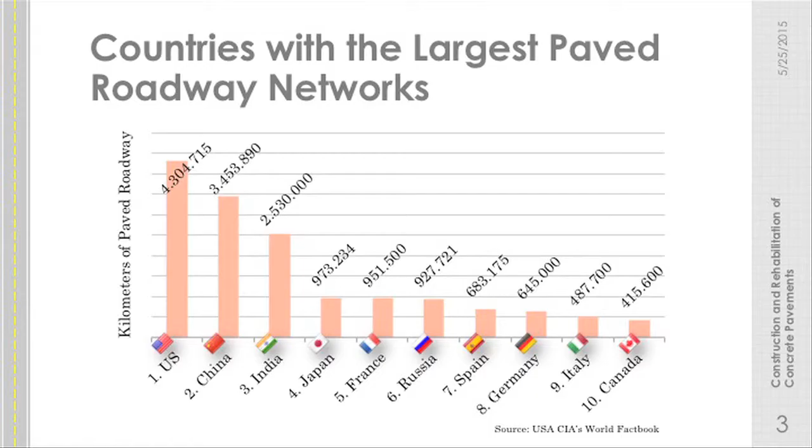My primary references for this presentation, I went directly to the source of the people that sell the equipment, because they take a lot of good pictures for publicity. So we have Wirtgen out of Germany, Gomaco out of Iowa in the United States, and Guntert & Zimmerman out of California in the United States. I've also pulled a fair amount from the internet, and I actually stole some photos from Astrid and other friends I've made along the way that I didn't reference like Mauricio did, so I feel bad for that. I'll point that one out, though, since she's in the crowd.

Again, we saw this photo earlier. In the US, we have a very large roadway network, and every year we pave on average about 50 million square meters of concrete pavement for roads. That's not everything—that's not industrial, airfields, and other spaces. That's roads. We're paving that much.

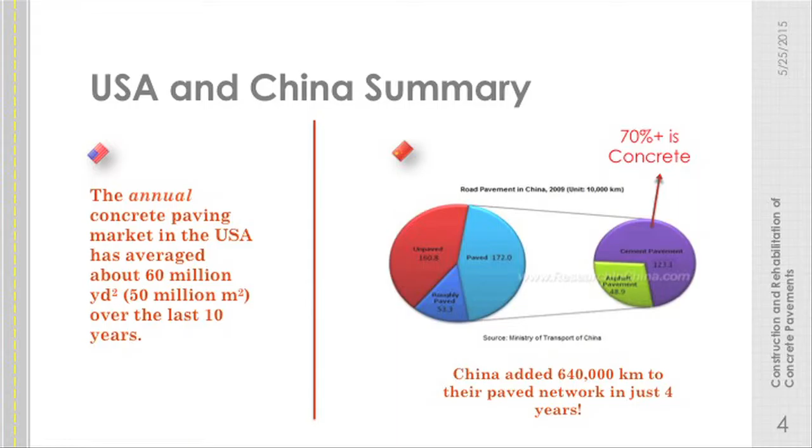Our biggest competitor, if you would call them that, with regards to roadway paving, is probably China. In the matter of 4 years, they added 640,000 lane kilometers of capacity to the roadways. And because they do so much manufacturing, they're moving a lot of raw material, building things, and then exporting the things they built to the US, Chile, and everyone else around the world. They have very high truck traffic loads.

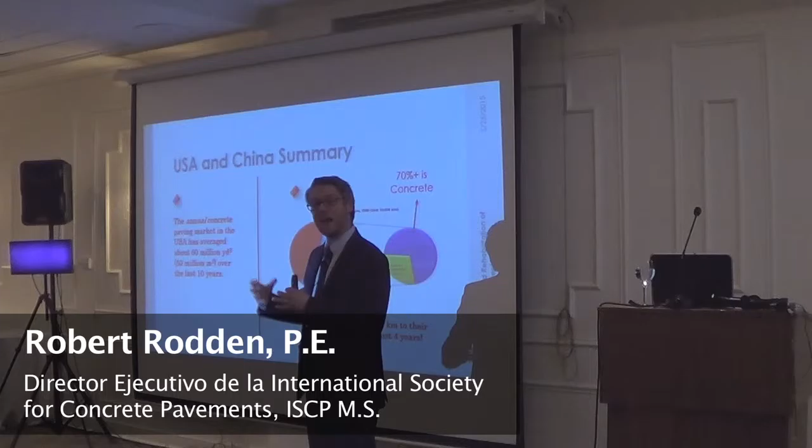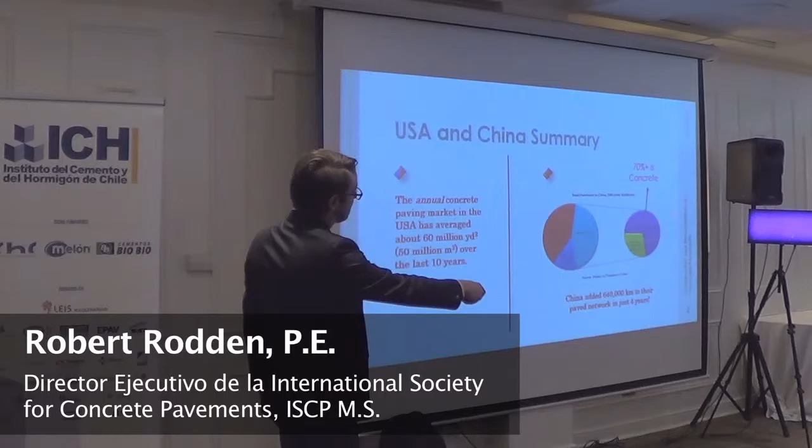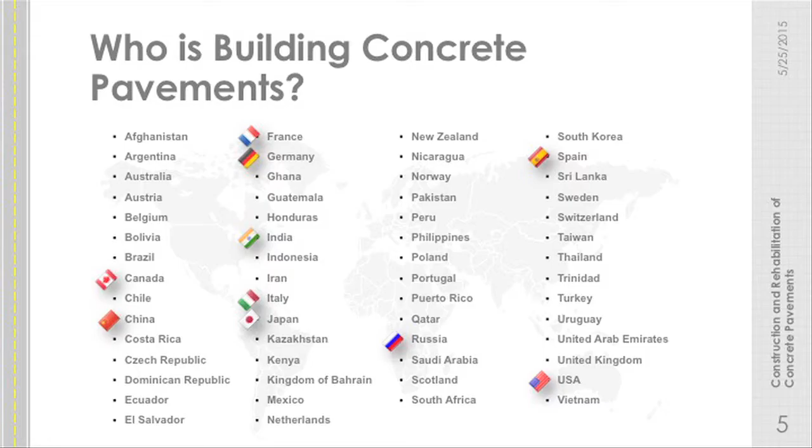In the US, our legal limit on trucks is relatively low compared to the rest of the world. In fact, most of our trucks, unless you're moving something very lightweight, drive around half empty. We say they scale out before they cube out—they run out of weight capacity before they fill their volume. In China, that's not the case. They fill the volume to move product, so they have very heavy traffic loads. Because of that, about 70% of their paved roadways are concrete, to fight against that and make serviceable pavements.

So who's building concrete pavements around the world? This is the list of countries that I've worked with or am aware of that build concrete pavements in my decade within the industry. All of those top 10 that we saw are on this list. If you know of any countries that are building or have built that aren't on this list, let me know—I'd like to get them added. But all around the world, people are building concrete pavements.

Some facts: the first concrete pavement in the world was built in Scotland in 1865. That section failed very quickly, within a couple of years. But some of the sections they built in 1872, about 140 years ago, are still in service—they're still there today.

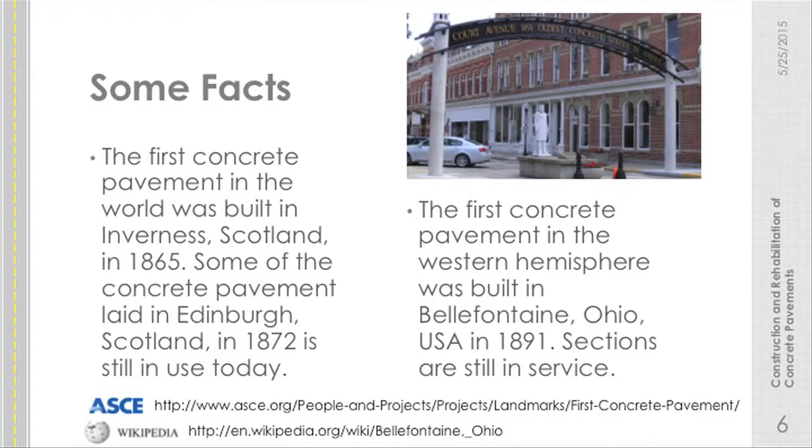The first section of concrete pavement built in the Western Hemisphere was built in Ohio. It's right here, still in service today. Built in 1891, it doesn't look great—it's had better days, but Ohio's a very high freeze-thaw state, and they use a lot of salt on the roadways. There was no structural design in those days; even into the 70s, we were still kind of guessing about things. So in 1891, what they did was say, we have lumber that is this tall, we will make a square out of that. The square's dimensions, the size of the slabs, was based just on mixer capacity—how much concrete can we make at once? Let's make it that big. That's it. No dowel bars, no tie bars, no logic about anything, just building concrete squares.

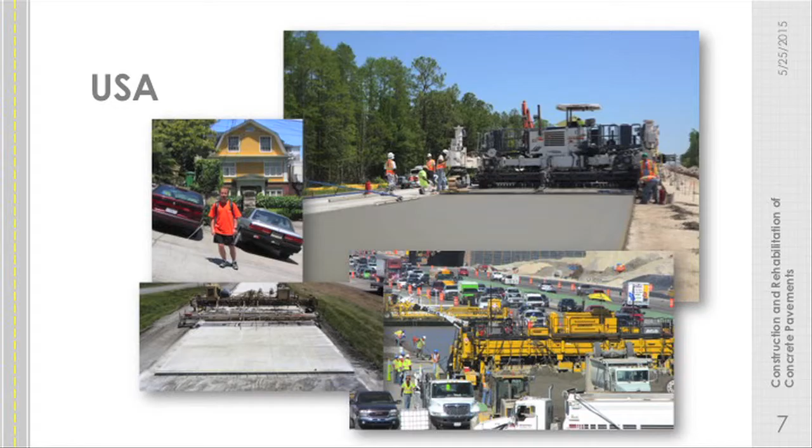The gentleman in that photo, the statue of him, George Bartholomew, had to put a 5-year warranty on that pavement. It's still in service over 100 years later. Is there a product in the world that's been warrantied for 5 years and lasted that long? Can't imagine any other product.

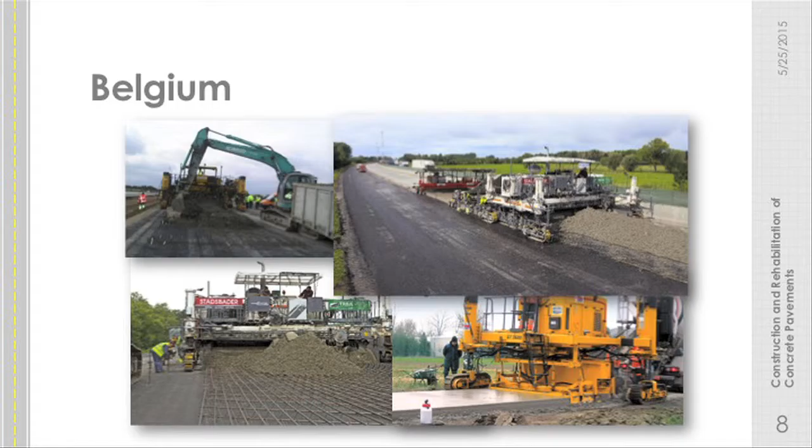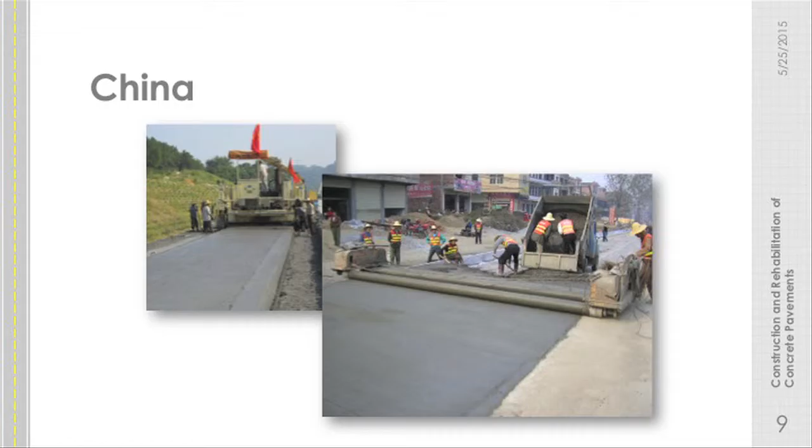So now we'll see photos from other countries. Just to try to be brief, I won't dwell too much on them, other than to point out differences. Like here, they're using a loader to move the concrete in front of the paver—we would never see that in the US. I'm not sure what limitation has them doing that, but they're doing that. They have dowel bars, as we use in the US. They also use continuously reinforced concrete pavements.

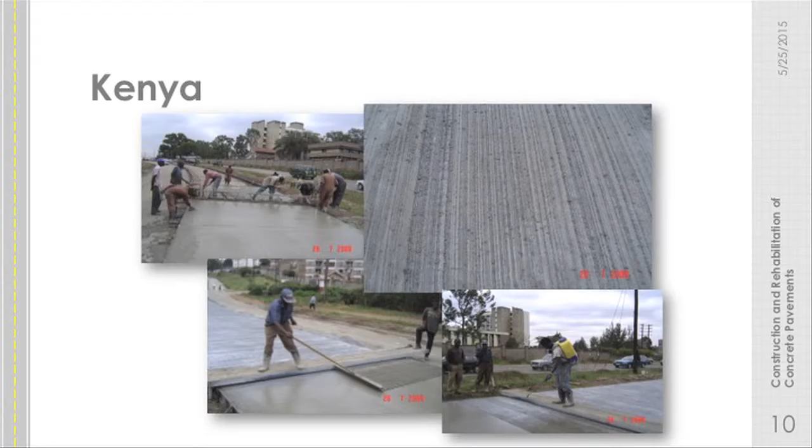In China, they're doing some fixed form paving without dowel bars. It's a double or triple tube screed. They're dumping right out of the back of trucks, right in front of the equipment, moving it around and leveling it off.

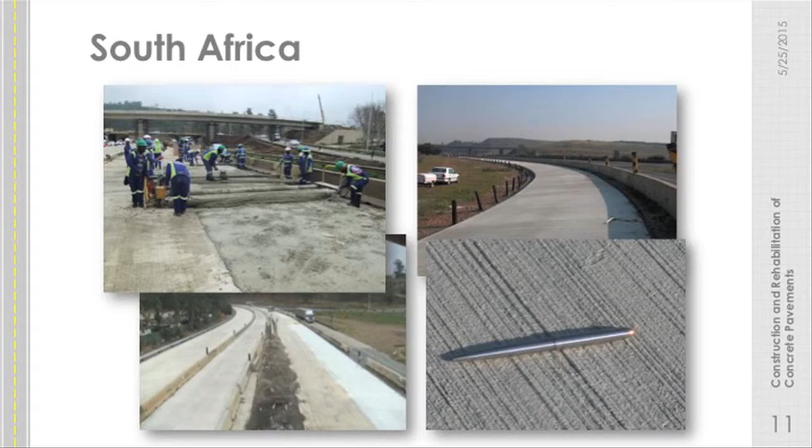Photo from Kenya. They have dowel baskets out there in front of this fixed form paving. They're using a truss screed, broom texture on the surface. You see that all around the world, and they're hand spraying on the curing compound. They don't have a white pigmented curing compound, but they're still using one.

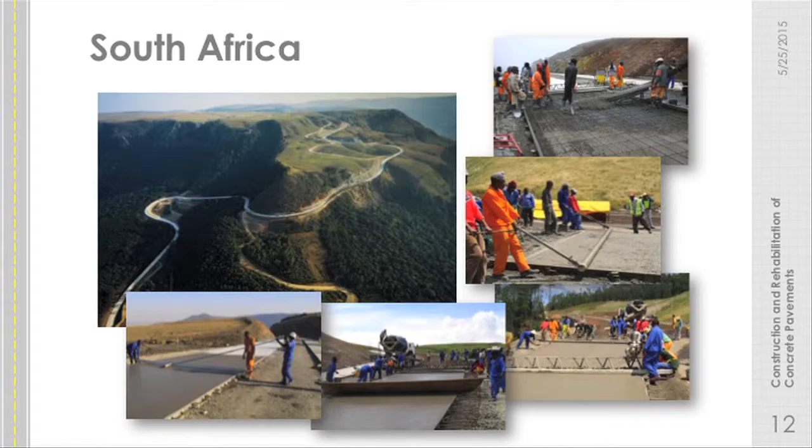South Africa. This is looking a little sloppy for what I'd like to see, but same idea. They're using almost the same piece of equipment that they had in China, and they're building very long stretches of concrete pavements in South Africa. Looks like they're also using a broom texture.

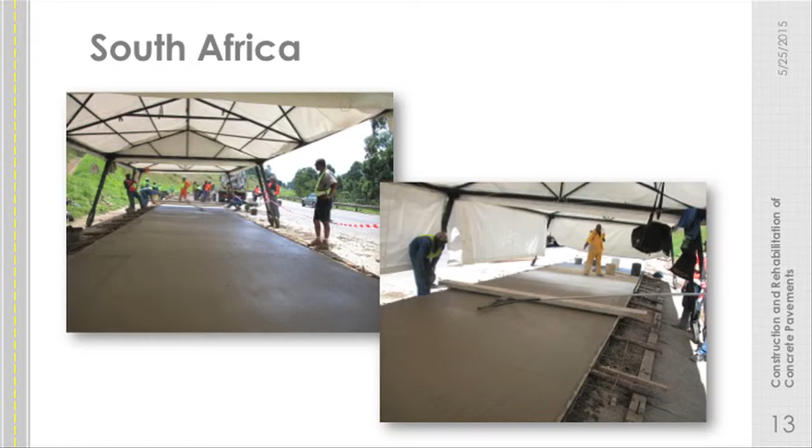Here's one project that I was told was in an eco-sensitive area. The supports for these bridges had to be constructed completely from above, with all equipment and material brought in by helicopter. Very expensive. So the roadway wasn't that much of a lift for them to build in concrete, even if the prices would have been more than asphalt. This is a large investment in the bridges there.

So this is up in the mountains, but they're doing the same thing. Fixed form, single tube, even up those slopes. They've got a truss screed following that, a burlap drag, finishing, texturing, and curing. Similar to what Mauricio showed earlier, they have tents, especially when they're up in the mountains and the weather can change like that.

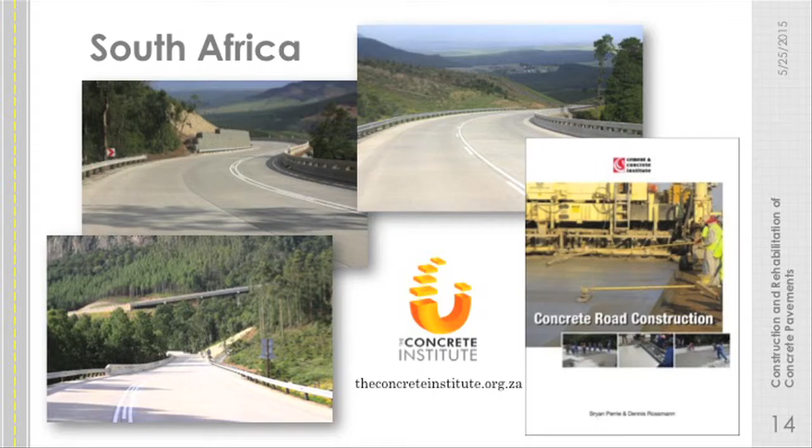And they have the sides they can roll down, but they're protecting that from the environment during the curing time. Some more photos from that one project in South Africa in the mountains. They do have a great document.

Now, in the US, with so much focus being on slip form paving, we don't have the best documentation of fixed form operations, I'll admit that. This document from South Africa is an exceptional guide to the topic of fixed form paving, because that is their standard. They do slip form paving, but it seems like a contractor has to have a large enough project to purchase the slip form paver to bring it in, and then they sell it off afterwards. But fixed form paving all day, that's what they do.

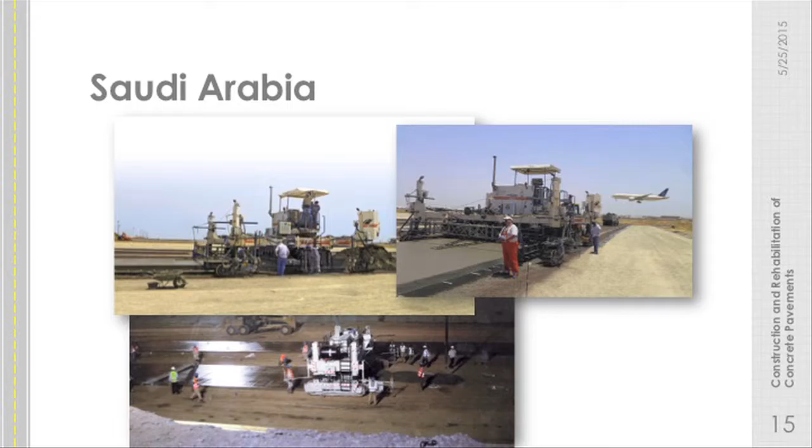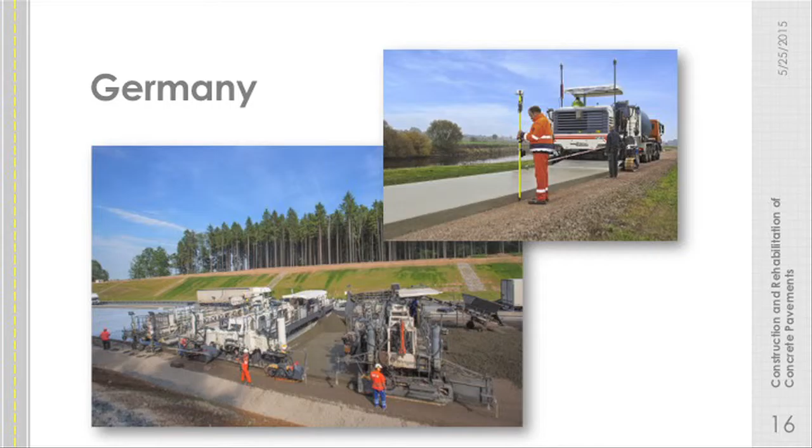Saudi Arabia, large production slip forming projects. At nighttime, during the day, we see the tie bar sticking out of the side. They have an auto float here. I guess we haven't seen that in other photos. That's another add-on piece behind the slip form paver that does the work of the person who otherwise would be using the straight edge. It just glides back and forth across the surface to help close the surface off more.

Germany, the home of Wirtgen.

It's like you get to look at Germany for a second while I figure out why it is we've stopped advancing again.

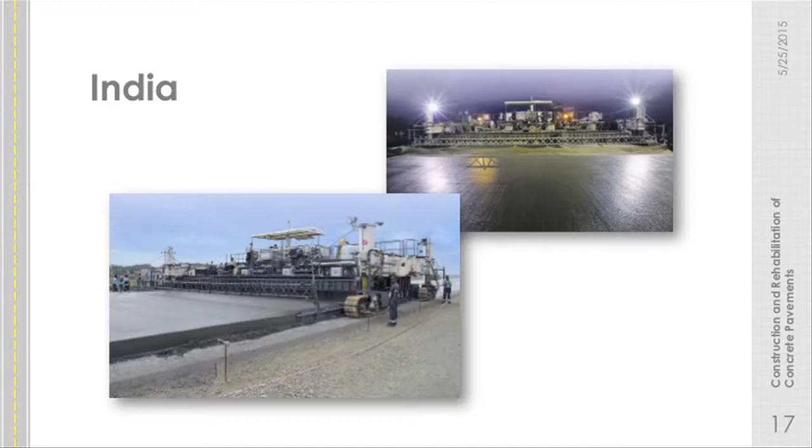What we see in the top photo here is some stringless operations. This is the rover. Hopefully we have time to get to that in innovations. It can measure the elevation of the subgrade, step that up on top of the slab, and measure the exact thickness of the slab in that spot, all using lasers. These are the masts supporting some prisms, which guide the whole machine just by lasers.

Some photos from India. They do a lot of roadways. That's a pretty wide span there. You wouldn't do that with fixed form paving probably, but slip form pavers can pave that way.

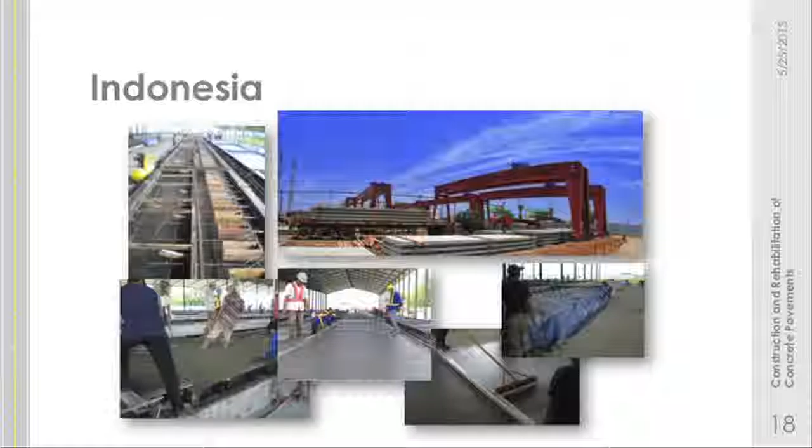Indonesia, this is one that I wanted to get to. Because the price of labor is so low there, they could justify precast slabs on a massive scale. In the US, we reserve this for toll plazas and overnight closures in New York City, Chicago, and Los Angeles—places where time is really money, and the DOT or owner doesn't want any of the time lost, so things are very quick. So for us it's very costly because it's small scale, high unit price.

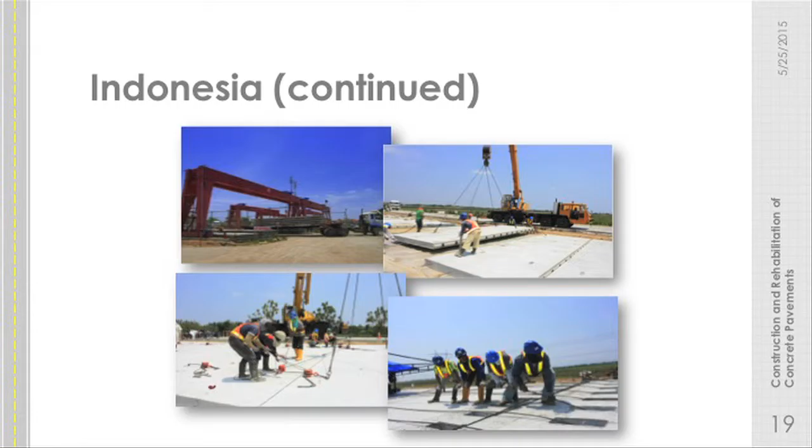In Indonesia, they built a massive farm almost, where they precast all the slabs and built up a stockyard, but did all the curing and texturing and everything in a controlled environment, then transported these slabs out into the field and built an entire new roadway on new alignment. I believe that was directly on the subgrade. This was precast, post-tensioned, and it was something like 50 kilometers long in this one instance. So it can be cost justified.

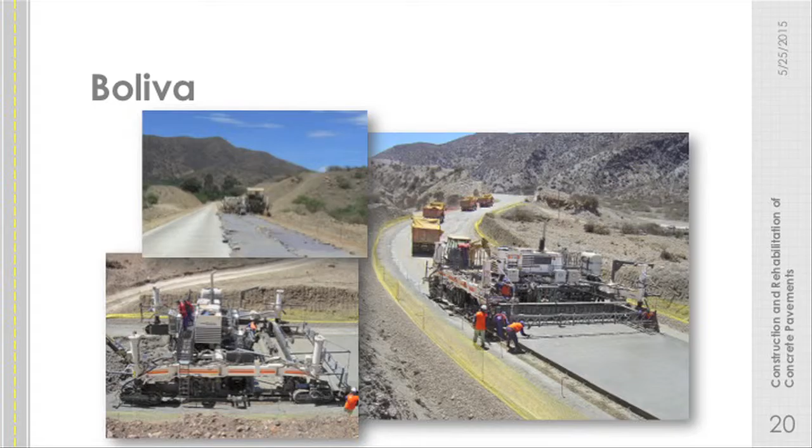Some photos from Bolivia. Here, this type of curing with a plastic sheet and rocks to weigh it down to keep it from blowing away—we would never use that in the US. We would just call that too costly.

If anybody has any comments on anything, do speak up.

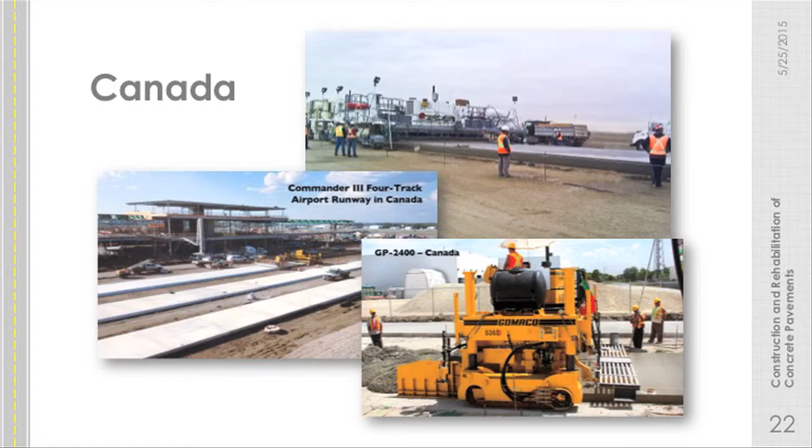Canada. Quick video from Canada.

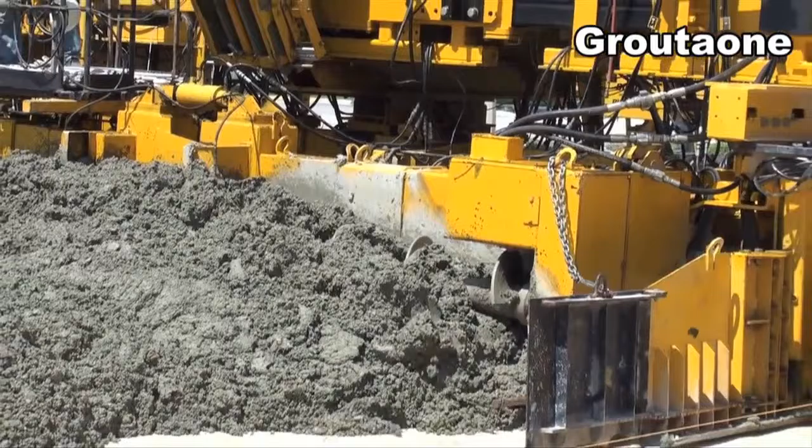Practices aren't that much different than the US, but we have our auger spinning up front, moving the concrete back and forth. It's not the quickest process, but it's pushing it into the corners.

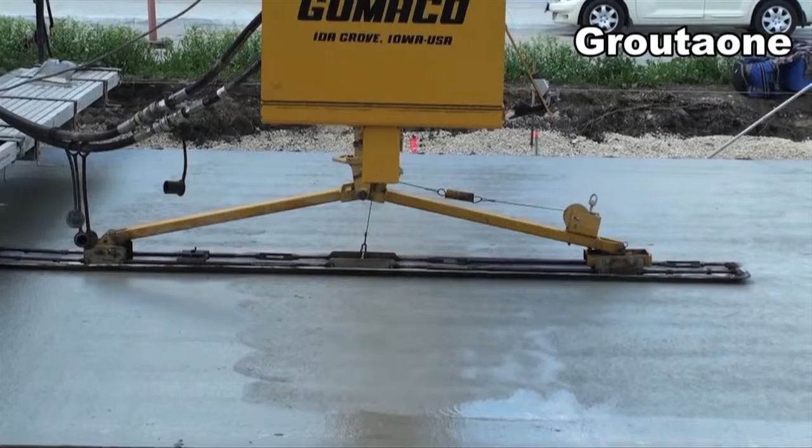They have this tie bar inserter, the rocket launcher on there as well. In this particular instance, they had some space limitations as well, which required them to install the dowel bars during construction.

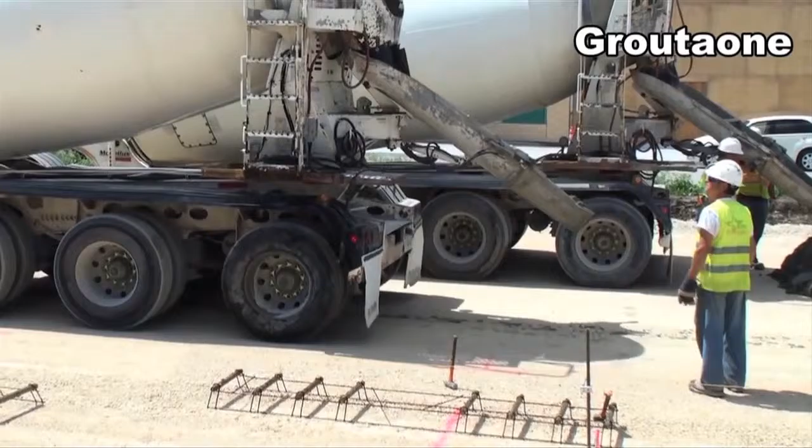Oh, you get to see the auto float in action. So that's what I described earlier. Instead of that one person walking with the straight edge, this device goes back and forth and adds just a little bit more smoothness.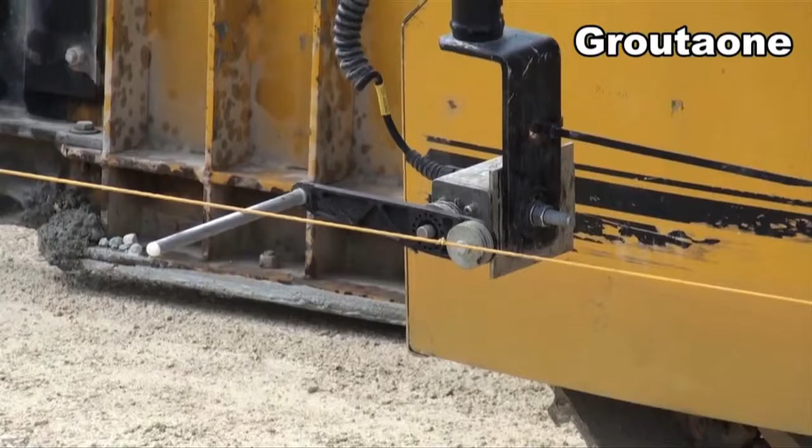So they have to deliver directly in front for some reason. On the fly, the contractors are picking up the dowel baskets and affixing them to the support. These days, we'd prefer to see that be done with some of the tapered plate dowels because they allow for some misalignment without locking the joints.

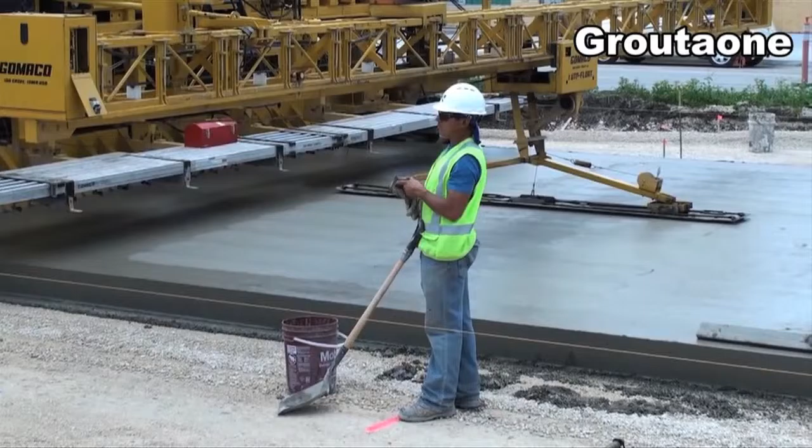There we have our wand following the string line for alignment. Sorry, that one's for elevation.

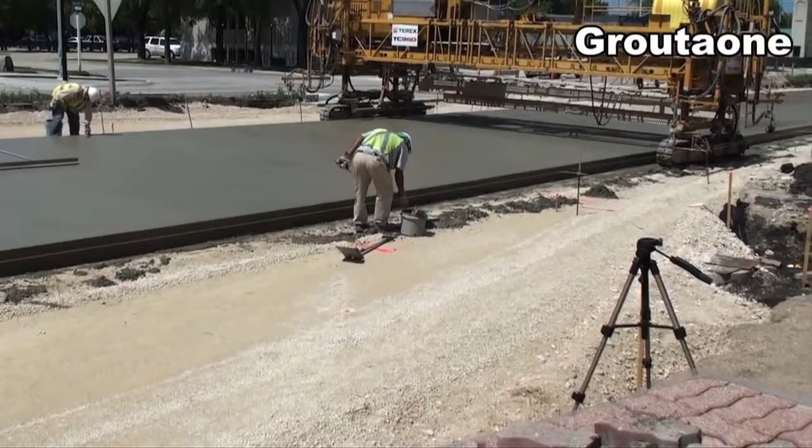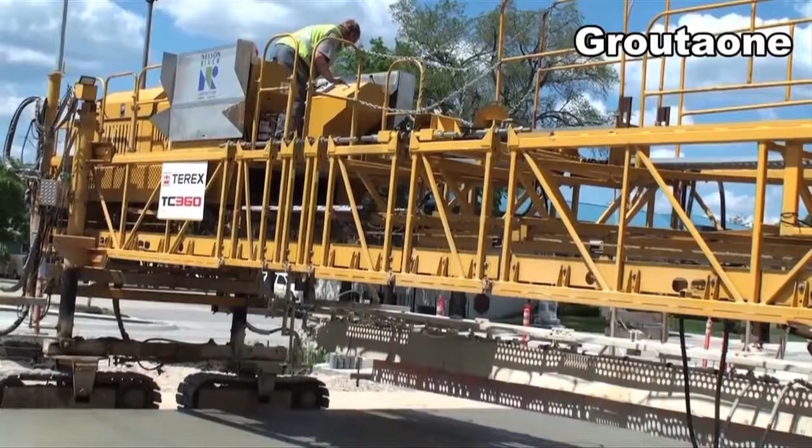Something to note on that. If the support system isn't great, which if you have as low of a CBR as you have, what happens is the track lines that are supporting the slip-form paving operation will start to settle into the support. And there's a lag between that happening and the machine correcting for it. There's a hydraulic lag. So having strong, smooth support is very, very important for the curing, or for the smoothness.

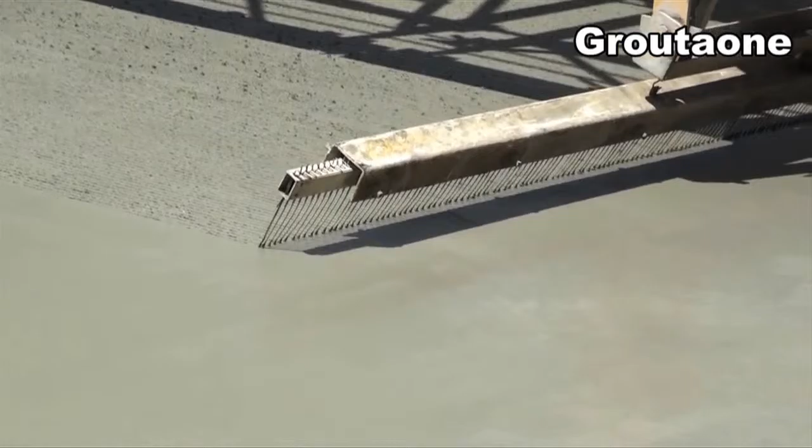Here's a texture cure machine, TC360. So that will apply. Looks like they were set up for longitudinal tine. Nope, they're doing transverse. So the transverse tine will stop, drop that, drag it across the surface, pick it up, move forward, and then go the opposite direction. And the same piece of equipment will also spray on a curing compound.

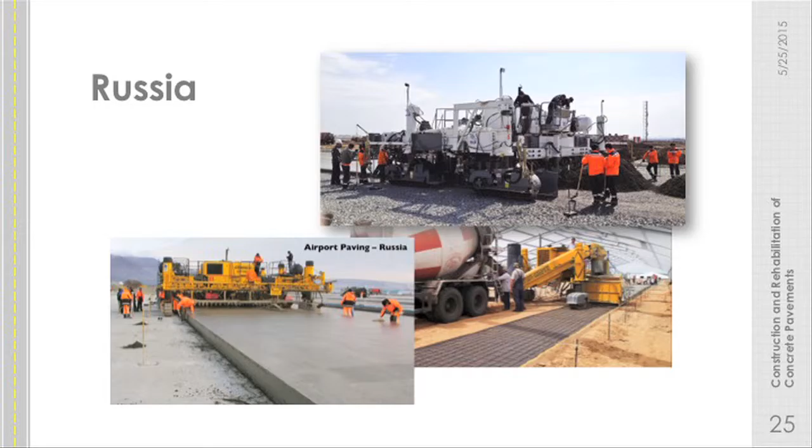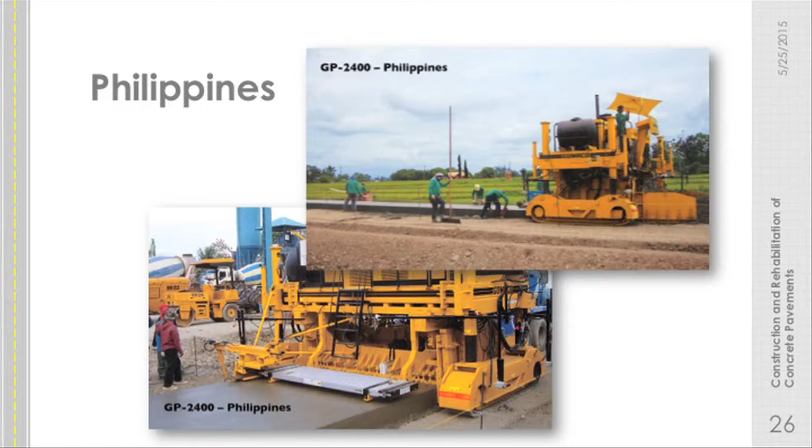So this video is really the whole process. Well-controlled, uniform process. Paving doesn't stop. That's what we're looking for.

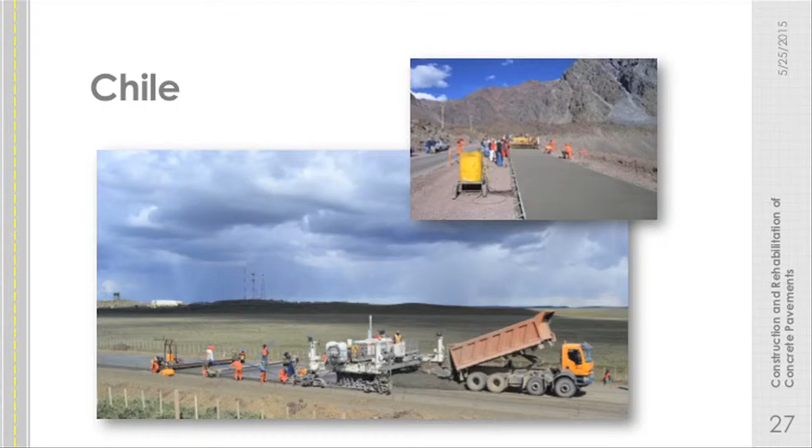Here's a photo from Astrid down in Patagonia. I don't know where this photo is. It's another Chilean photo, though. Any idea where that is, Mauricio? With the fixed form paving?

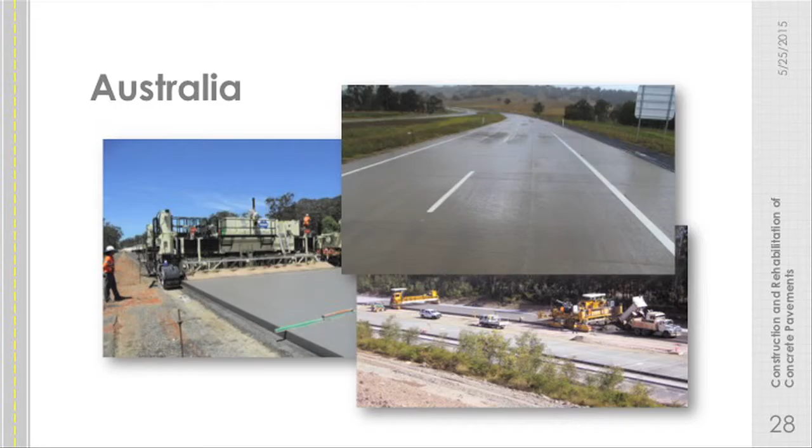But it looks like they've got some equipment riding on the forms. This one? Yeah. What about this one? Los Andes. To Argentina. Now I know. I've been using that photo for years, and I have no idea where it's from.

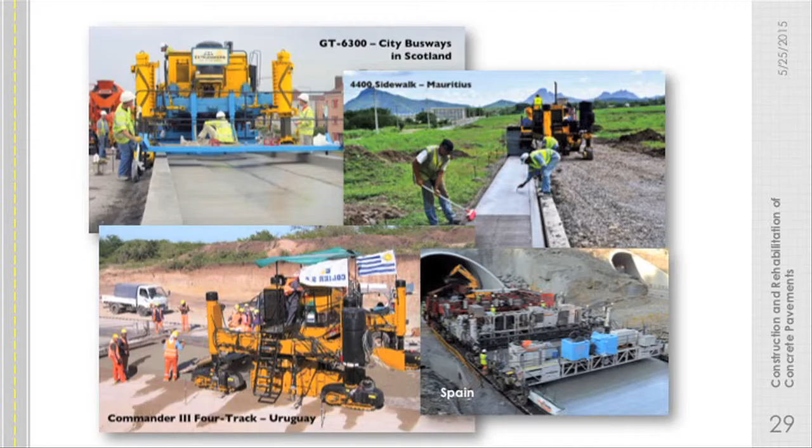Here they're placing joints. I mentioned that earlier. We did that project in New Mexico where we advised that they have a longitudinal joint in the middle of the lane, and the slab width is basically from middle lane to middle lane. Come to find out, Australia's been doing that for decades. It wasn't until I proposed writing a conference paper about it and had a discussion with a colleague on the topic that he said, 'That's nothing new, Robert. We've been doing that.' Okay, send me some photos and we'll write the paper together. So sometimes you find out your innovations aren't so innovative.

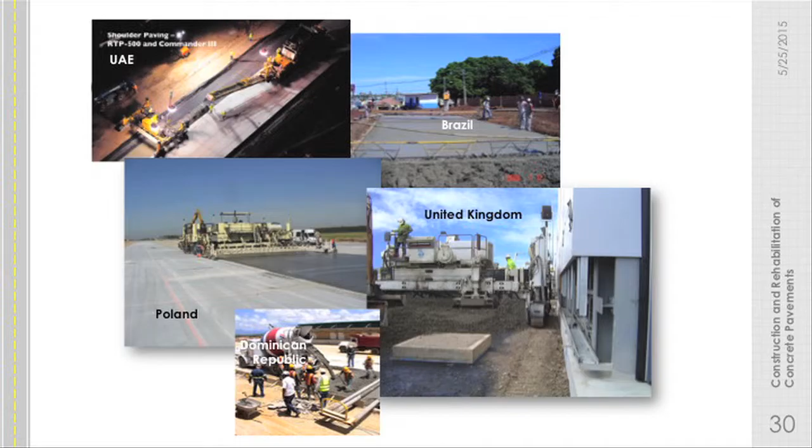Busways in Scotland. There they've got an inverted pitch. So that's a bus-only lane separate from traffic. That's also going to help with some of the drainage challenges in that local area.

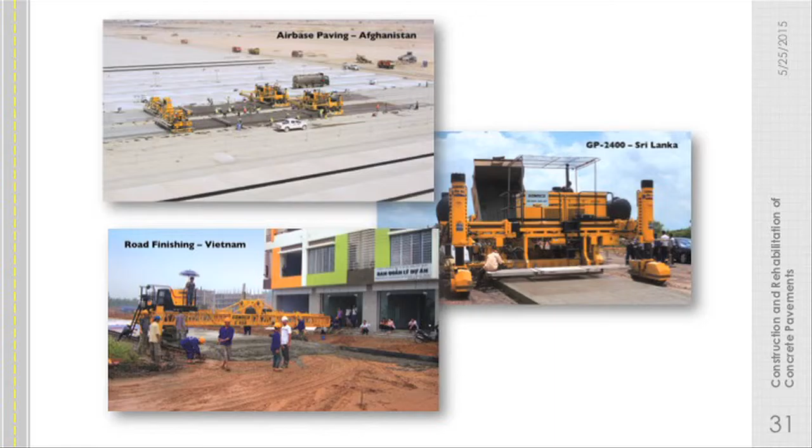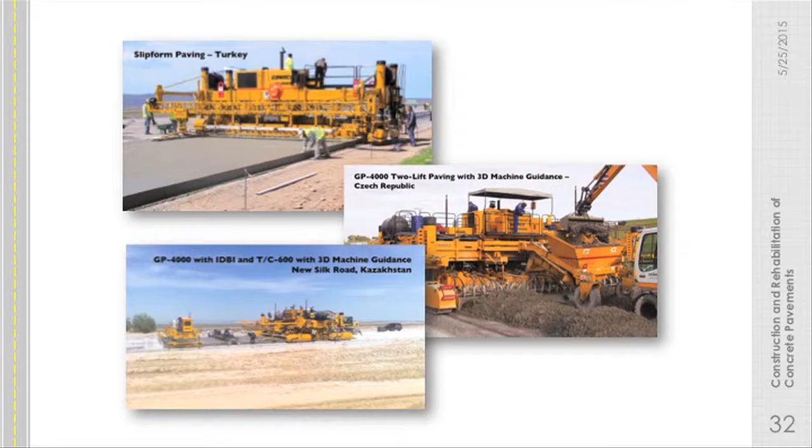Uruguay. Spain, here they're paving into a tunnel. The UAE, Brazil, Poland, the list goes on and on and on. But it's all the same process. We're getting fresh concrete, placing it out in the field somehow, leveling it off, applying a texture, curing it, and saw cutting it. Afghanistan, Sri Lanka, Vietnam.

In Turkey, things seem to be catching on there very quickly. I think they're doing a fair amount of roller compacted concrete now.

Czech Republic, we had a conference there this past year where we had the opportunity to go out on some of the projects that were being built in that photo. Kazakhstan.

It all starts to look the same after a while because it's the same process from place to place. And there's only so many manufacturers of equipment. And we do have a pretty well-developed and honed-in method of construction at this point, such that the innovation at current is happening more in the materials, especially for corrosion resistance and geometry for dowel bars, the cements and the concretes, and not so much in the construction methods. Construction methods you're getting high volume without surprises, right? That's what you want as a contractor.